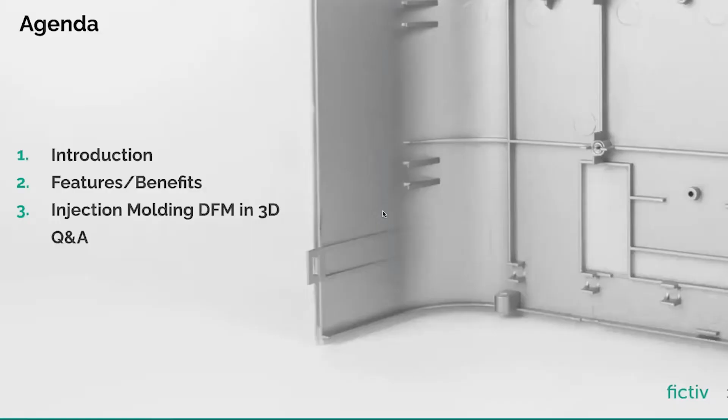My name is Michael, and I'm your moderator for today's webinar about Fictiv's new enhanced injection molding quoting experience. This presentation will introduce you to Fictiv's injection molding service, then walk you through the features and benefits of our new 3D DFM technology that improves Fictiv's injection molding quoting experience.

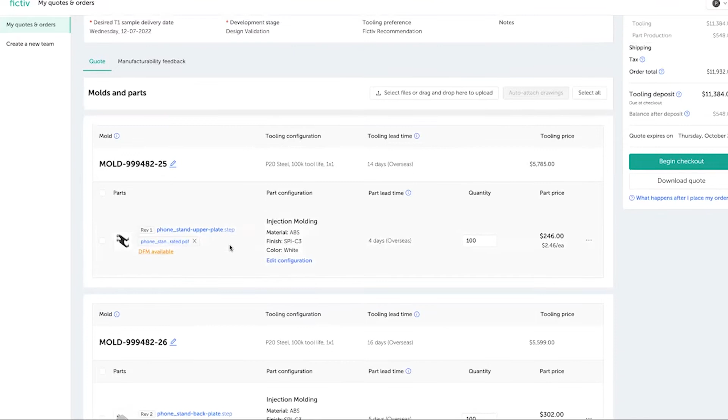And with that, let's get to that part of it, and let's see how, as a customer, you can interact with your DFM report and what kind of information is provided to you as part of a preliminary DFM feedback for your injection molding quote.

So if I click on the DFM available button here, I'll be taken to a second tab in this same page called Manufacturability Feedback tab. In the Manufacturability Feedback tab, I can see that, yes, each of the parts are associated with a feedback. So if I click on View Feedback button, I would be able to dive into reviewing the feedback.

But in addition to that, we have this button that gives you a glimpse of what topics are included in the DFM feedback that you have received from Fictiv for that particular part. So looking at this summary view, you can see that there are 4 topics: draft analysis, thickness, sink, and 2-dimensional drawing review.

And here are the actions that are requested of me as the customer. For example, it says approval required, right? Let's take a look at the second part as well. Again, the same thing. I can see some side actions going on: draft analysis, thickness, sink, and 2D drawing review.

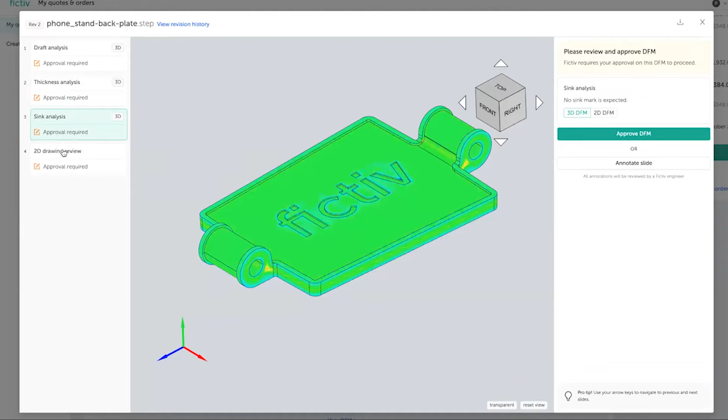So with that, let's just start with the first part. Let's dive into the DFM feedback and see what is included there. So this modal that just popped up is called our DFM review modal for our customers, where all of those topics that you have seen in the summary view are available to you for review in a slide-by-slide format, right?

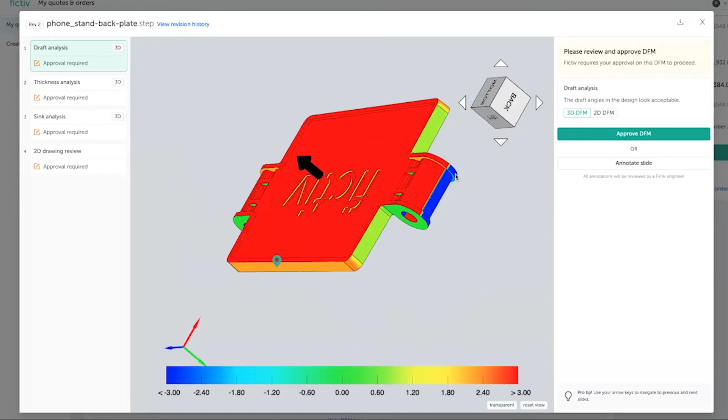Now, let's get a little bit deeper into it. So the first slide is a draft angle analysis, right? And you can see that there is the 3D label next to it. What it means is that you can actually interact with your design while you see the color texture that shows the draft angle analysis on this part. Basically, you can interact in a 3-dimensional view with your DFM feedback.

So just to be clear and a heads up here, the text and the analyses that you see here are mainly created by me for the purpose of this demo and webinar, so take the wording with a grain of salt. I'm not going to be the expert who will deliver your DFM feedback. We have a specific team for injection molding DFM feedback. I just prepared these parts for the purpose of this demo.

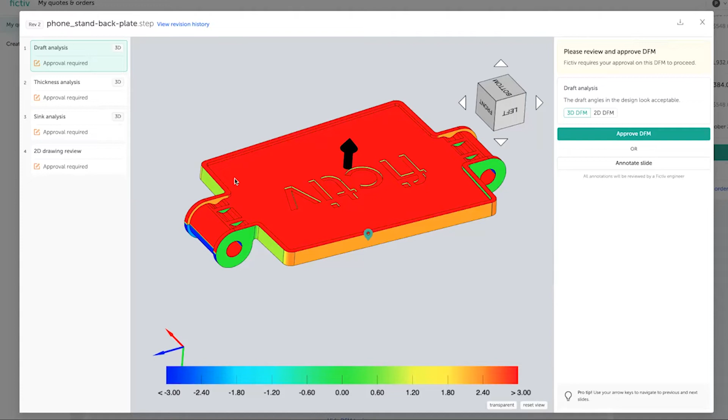So with that said, let's take a look at what type of information you would get out of the Fictiv platform in this 3D view. The color texture here shows the draft angle on different faces of this part. In this part, this is going to be your pull direction, when the mold opens up and the part is going to be pulled out and released out of the mold.

So with this pull direction, these areas on the side are going to need some draft angle for the ease of the release so that you don't have any drag marks on your part, right? And if you look at the color chart at the bottom, it will tell you that this side, which is this orange looking color, is going to be somewhere around 2 degrees draft angle. And the message here tells you that this draft angle for this design looks acceptable. So what we need from you is just go ahead and approve it.

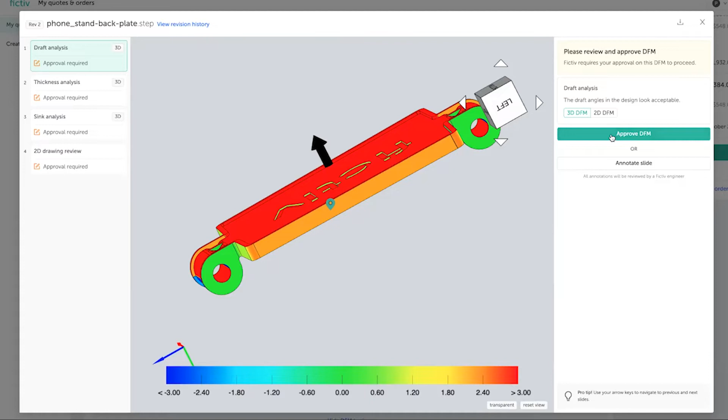So basically it's just a heads up to tell you that your part is in a manufacturable state with respect to draft angle, right? And with that, we can just go ahead and approve this particular slide. Now, one other thing that I want to get everyone's attention on is that we have a 2-dimensional version of this analysis ready for you here as well.

We had two intentions in preparing this two-dimensional view as well. Number one, you may want to download this DFM report for communicating internally with your team, or use a copy of your DFM for your internal documentation or other reasons, right? So this is what you see here. The two-dimensional version is basically the view you would see in the downloaded PDF version of this report.

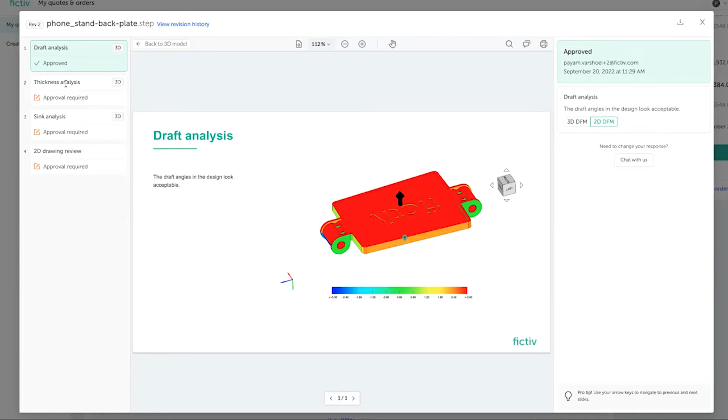The other intention with providing this two-dimensional view was that in case you have any questions, comments, or clarifications to ask Fictiv, or you want to provide some additional insight about your design and why certain things are a certain way, you can use this view to communicate with us. And I'm going to go over that with you in reviewing the next slide.

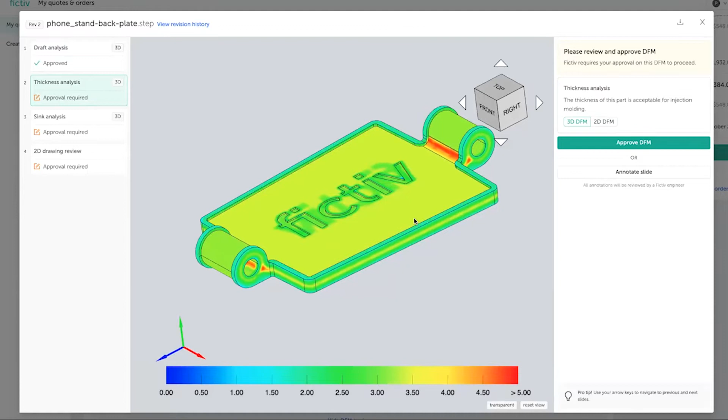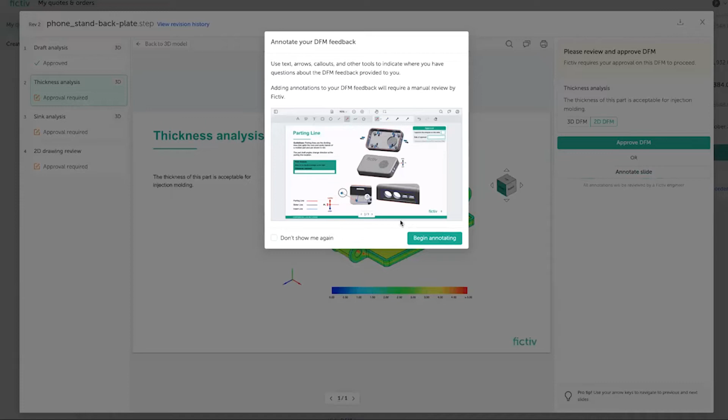So this is a thickness analysis slide. The purpose of this analysis is to show how consistent the thickness of the part is throughout the design. And as you can see, this part has a pretty consistent design in terms of thickness. So let's say I have a question about an area of the part. In the two-dimensional view mode, I would be able to click on this button that says annotate slide. I'll be given a message about how I can annotate and save afterward.

Now I'm inside my two-dimensional slide that represents my three-dimensional DFM, right? And I can use different annotation tools like shapes or arrows or text to ask my questions and comments. With that, I would be able to communicate my questions and comments with Fictiv. Of course, you will be able to change the color or the text size and all the common editing capabilities.

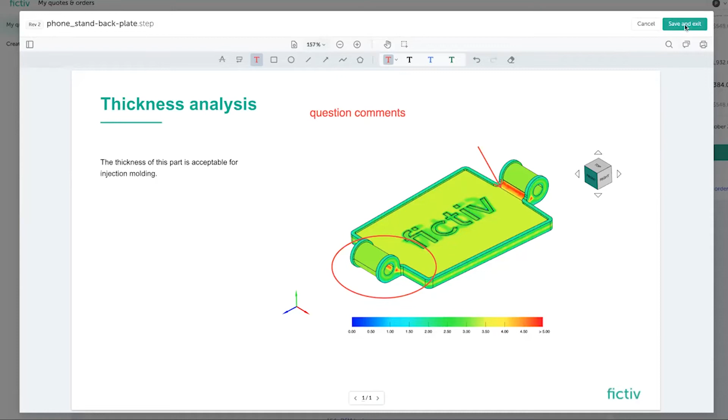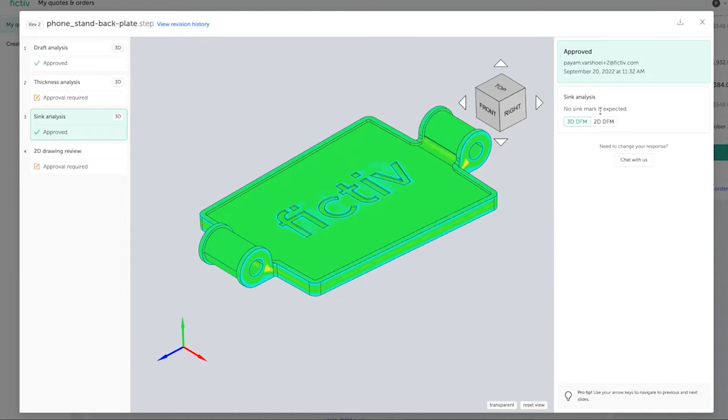So once done, I can just save this annotated view, and it will be saved in the system and be available for the Fictiv team to review your questions and comments. With that, we're going to move on to the next slide. Let's approve these. The next one was sink analysis, just to show the areas that have the risk of sink. As you can see in this design, we haven't seen any risk there, and the message also says that.

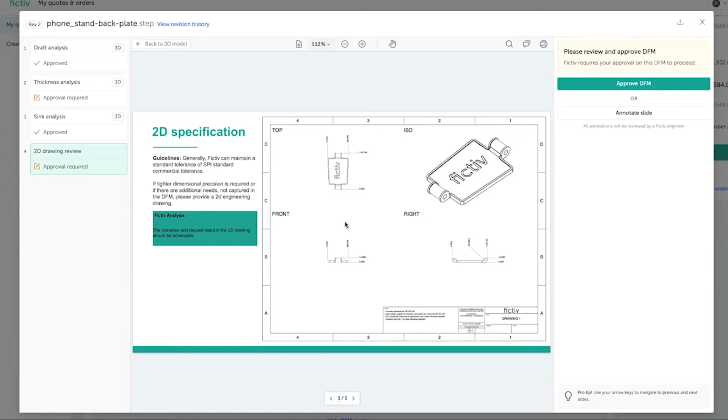The 2D drawing review is just to point out certain specifications on your drawing. If you have mentioned a specification on the drawing that is either questionable, or there is a risk of not being able to meet it without a design change, it will be called out here. And if there is any risk of going out of tolerance, Fictiv will communicate with you that, if you want to hold this particular tolerance called out on this drawing, you have to make such and such design changes, which will all be communicated on a page like this.

But in this case, the assumption is that there's no problem, so we're just going to approve. And with that, our first part has been reviewed, so let's take a look at the summary view. Now, if you look at the summary view, you'll see that the statuses have been updated. I approved three of the slides, and on the second slide, the thickness analysis, I had some questions and comments. That's why the status has changed to pending Fictiv review.

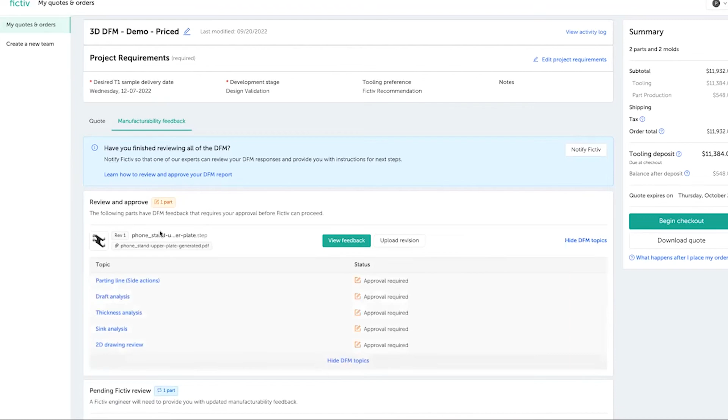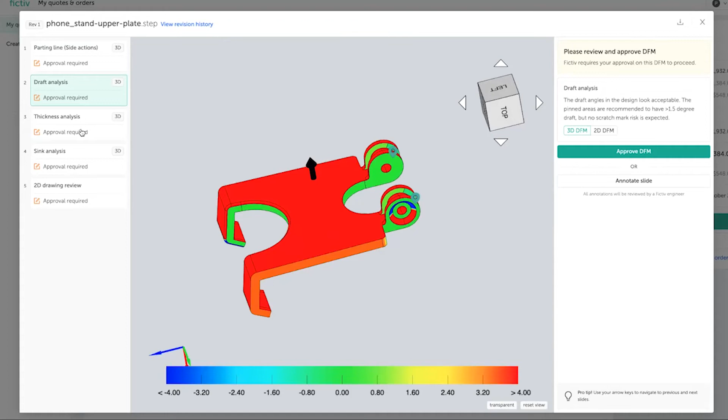Same goes for the second part. Let's just dive into it real quick. As you can see, there are four slides that have the 3D label, so you would be able to interact with them and turn and twist them in the 3D viewer, and each of them comes with a two-dimensional view as well. The first slide that was not included in the previous one is, for example, our side actions. These are the undercuts that need to be created by a side action, let's say a slider, lifter, things like that. And these are called out here.

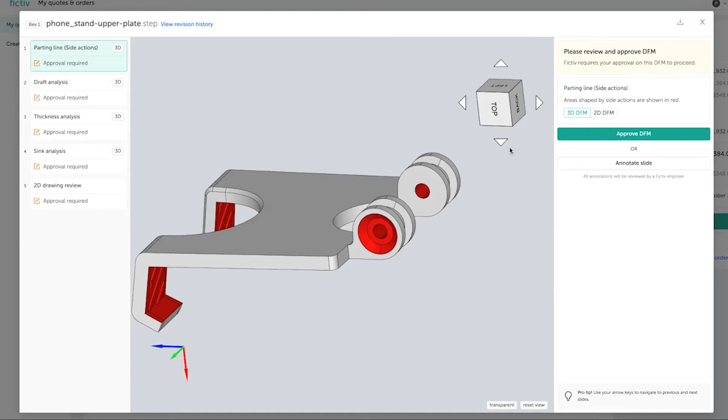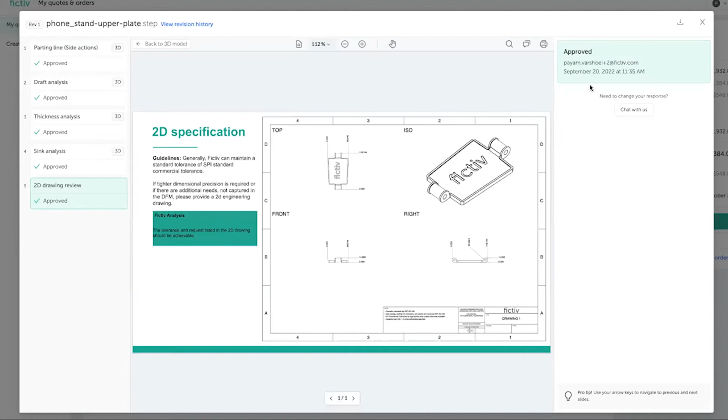And none of them are associated with any warning in this particular case. So I'm just going to go ahead and, let's say, review and approve them real fast. Sink analysis, and again, a drawing review for this part as well. Cool. So when I approve any of these slides, as you can see, the person who approves them and the timestamp will be shown here.

So with all that said, let's go back to our quote and take a look at the status of the quote. Oh, one thing that I would like to point out is that when you are done reviewing your designs and the DFM report associated with your design, you can actually use this button that says Notify Fictiv.

While you are reviewing your design, especially if you leave annotations or messages for Fictiv, your Fictiv representative will be notified, but we still put this button as a means for our customers to communicate with us that they are done reviewing all of their DFM feedback. So you can totally use this and let your Fictiv representative know that you're done reviewing the DFM feedback.

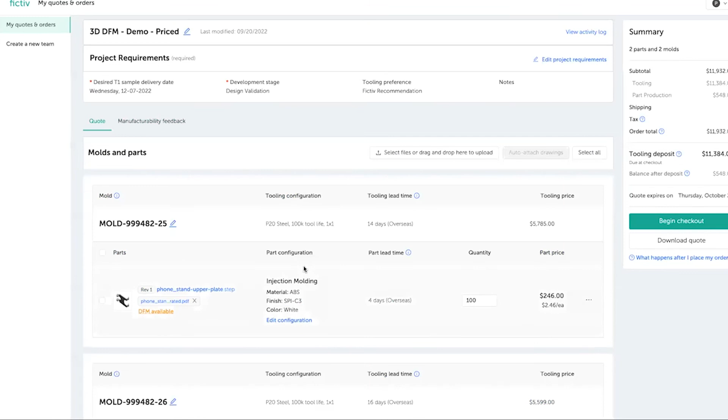One thing that again I want us to give some attention to is the fact that one of my parts is actually on revision 2. So this means that at some point I have updated my CAD model and uploaded the updated CAD model into the Fictiv quoting platform, right? So that is a very common functionality.

Anytime throughout the quote lifecycle, you may get, let's say, a DFM input from Fictiv that, for example, you need more draft angle on these areas, right? You need to go back to your CAD model, increase the draft angle, save, come back to Fictiv, upload it, right? So that's, again, a very common functionality.

But the question that could be raised here is, okay, so then what happens to the DFM report that I received in response to my revision 1? Where can I find that? Because the communication that happened on that DFM, how you responded to it, what Fictiv said, how you asked questions and commented on it, might be of interest if you want to go back and check the history.

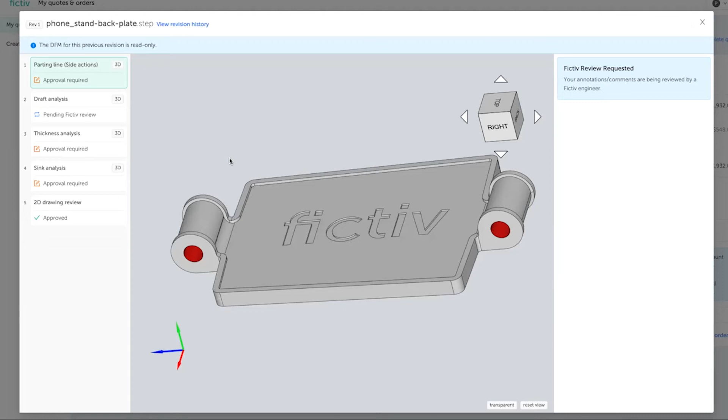And note this banner message here that says the DFM for this previous revision is read-only, right? It tells you that this is what happened in the past, so it's not changeable at this point. If you have slides that have not been approved, you can no longer approve them, because this is a snapshot of the past just for your reference. And the good thing is that if you have had any question or comment about your design or about the DFM from Fictiv, you would be able to refer to it.

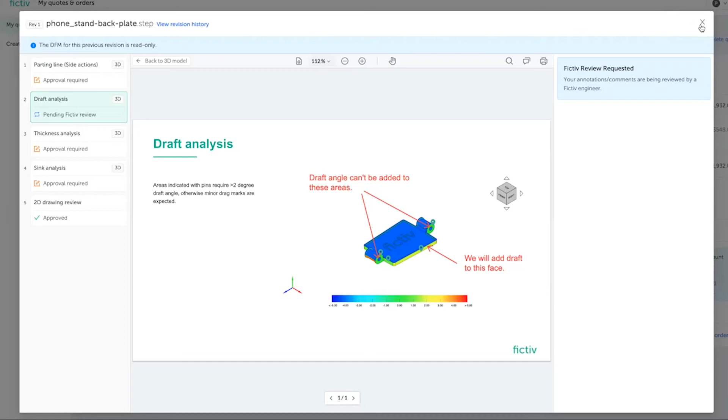In this particular case, as you can see, the draft angle was too low, so there was a risk of drag marks, and I have updated my CAD model to have a draft angle of greater than, let's say, 2 degrees. And I was communicating that these two faces I can't give a draft angle, but this face I will update. As a result, I went ahead and uploaded, right? So that's just a point about how you can get access to a part's history on your quote.

Now, with all of that said, since you had some questions for Fictiv, you will receive answers from Fictiv and can move forward with the checkout. So I'm not going to get into the checkout process. That's a normal checkout functionality; you can go ahead and begin checkout after you receive

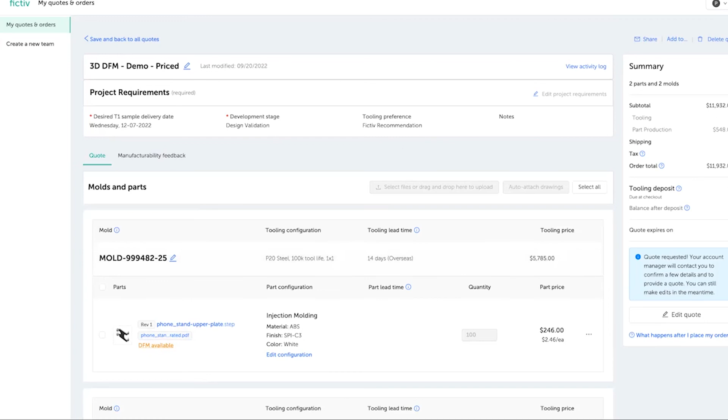answers to your questions. The reason you don't see the checkout button here is that I have asked questions, and I have parts that are pending Fictiv review, as you can see here. And once Fictiv reviews your questions and comments and responds back, you will be able to actually complete your checkout.

So the next thing that I would like us to take a look at is that this functionality is not limited to before you place an order. Even after you place an order, you will still receive DFM reports from Fictiv, with higher focus on your mold design, for example, how your gate would look, how your ejection mechanism would look, and things like that, right?

I just wanted to show you how you would be able to access the DFM reports after your order. So this is an order that I've already placed in the past, just for the purpose of this demo, to show you how to get to the DFM. The layout of the page from a DFM review perspective is very similar to what I have gone through in the quote: you have this list of line items for the order. So you have your part line item, you have your mold and the samples, of course.

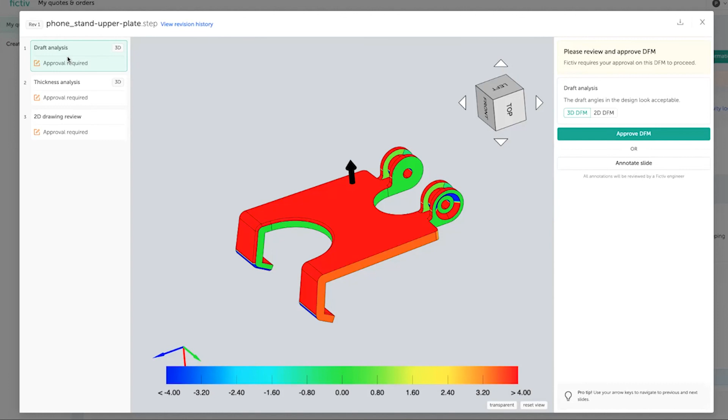Of course, with regards to this particular design and for this demo, I have not created any comprehensive post-order DFM content, because those are more complicated and have to be done by the experts. My purpose is just to show you here that similar DFM content is going to be available to you even post-order, and you can review them, approve them, and continue this communication with Fictiv even after your order has been placed.

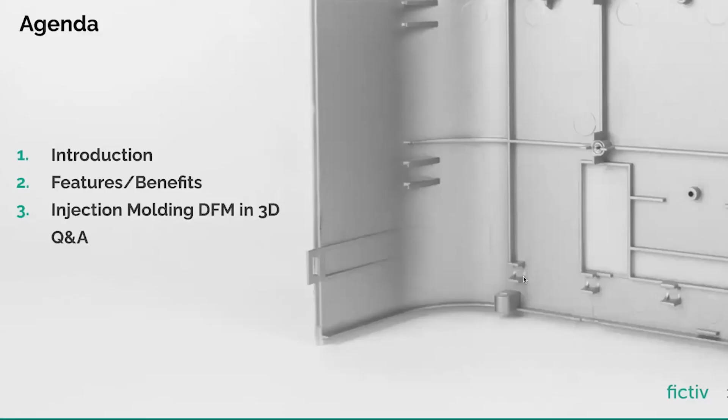So with that, in terms of what I wanted to cover as part of the demo, we are done. So to summarize the benefits and values of this feature set: when Fictiv works on design for manufacturability, especially for injection molding, our goal is to catch any kind of design flaw or any room for improvement that makes your design better, more manufacturable, and less prone to defect risk, as early as possible in the design and before the manufacturing process.

That's our main goal, and we really want to deliver guided expertise from our side to you, so you have higher confidence in moving forward with your design, especially for injection molding, which is on the more complex side of manufacturing processes, since there's always a mold involved. Before a mold is actually fabricated, you're not going to have a part. And a mold is a significant investment in terms of cost and the time it takes to fabricate. That's why the earlier we can catch those design flaws or find room for improvement, the better.

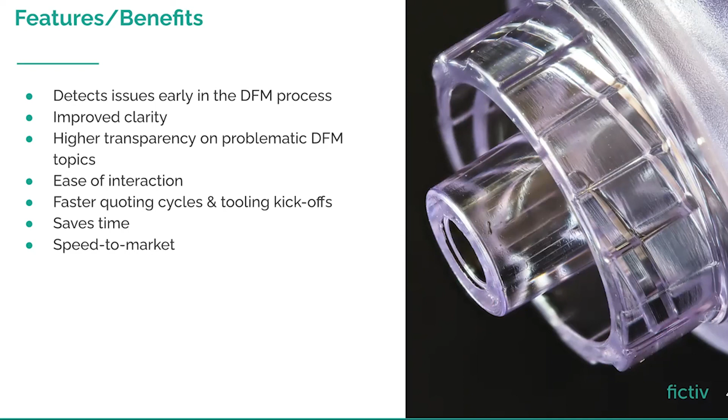And eventually, our hope and our goal is to save time for you throughout this design for manufacturability process by delivering a meaningful, high clarity report, as clear as possible, so that we can agree on certain changes to the design if it really needs a change in order to become manufacturable as fast as possible, so that you can maintain your deadlines and your speed to market.